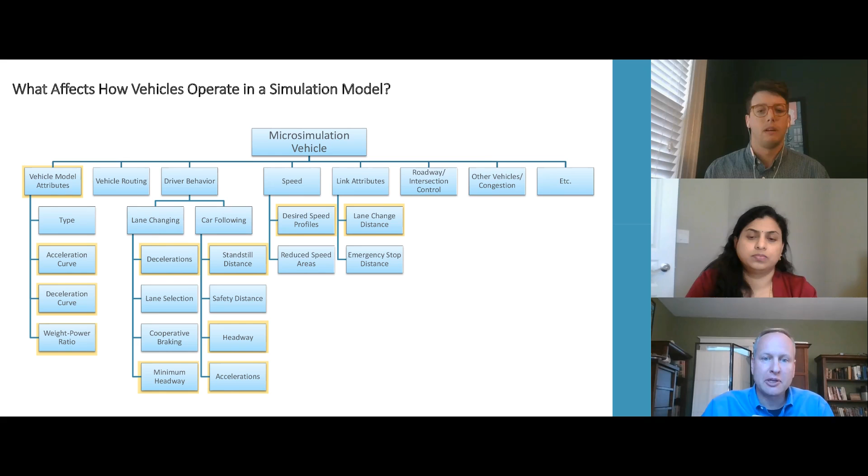The next slide shows how we try to capture many of those in the model. In the model, there are vehicle attributes and acceleration and deceleration. There are driver behavior characteristics, and there are lots of those - humans are complicated, so there's a lot of driver behavior issues there. Then there's speed profiles that affect the range of speeds a vehicle is going, say on a 55-mile-an-hour road. There are link attributes for how you drive a piece of road when you know you have to turn up ahead - when do you get into the right lane? So there are all these different things, and Adam is going to pick up here - all the ones that are highlighted are really the parameters we have focused on in our work, and they're key parameters that affect how the models function. Adam, with that, I turn it over to you.

Thanks, Rob. As he mentioned, the highlighted ones are the ones we're looking at. There are really 9 key parameters that we're going to be discussing and that we've tried to develop values for. A main piece of the phase 1 work leading into phase 2 was identifying the parameters - we just popped up on the screen like 20 different things, so identifying which ones are important and which ones we think we can impact.

We selected them really based on them fitting into one of three criteria: parameters that are frequently changed, parameters that have significant impacts on models whether they're often changed or not, and parameters that potentially have default values significantly different from Kentucky values. Those are the 3 criteria we were using, and from that we determined these 9 parameters to be the ones we thought we would study and try to develop information for.

I'm going to turn on this drawing tool so I don't talk with my hands as much, but these are the 9 parameters. I'm going to try to run through them here pretty quickly, just giving an overview of what they are, and then I'll follow back up on each one to go a little bit more into the weeds.

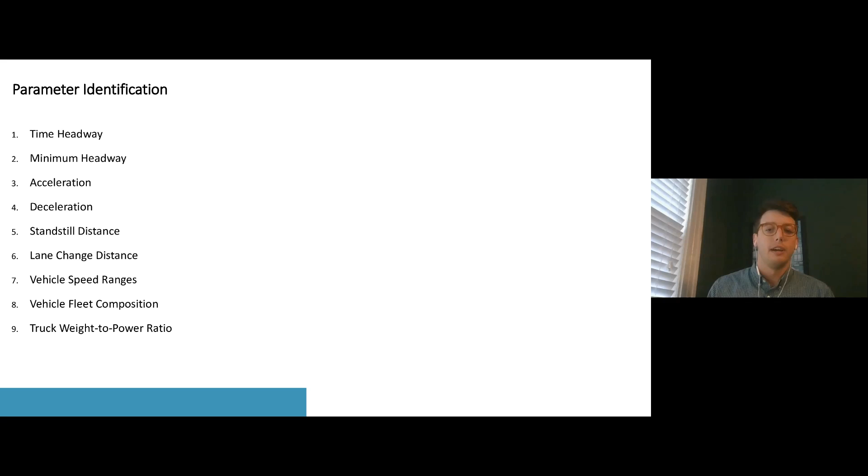Time headway is really the spacing you're leaving between vehicles when you're driving - the air gap between you and the person in front of you. Minimum headway is how close you're willing to get if you have to make a drastic lane change, merge, or weave maneuver - not what you're trying to do, but your tolerance for how close you will get.

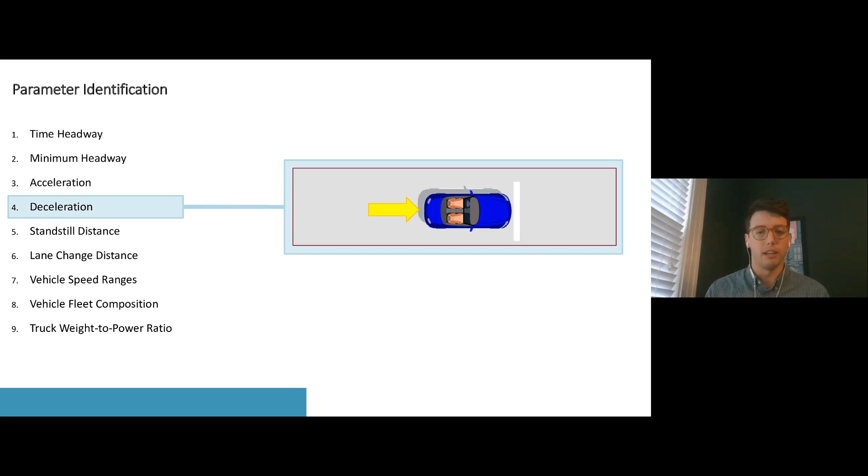Then we have acceleration and deceleration, which I think everyone is familiar with - just how fast you're increasing or decreasing your speed.

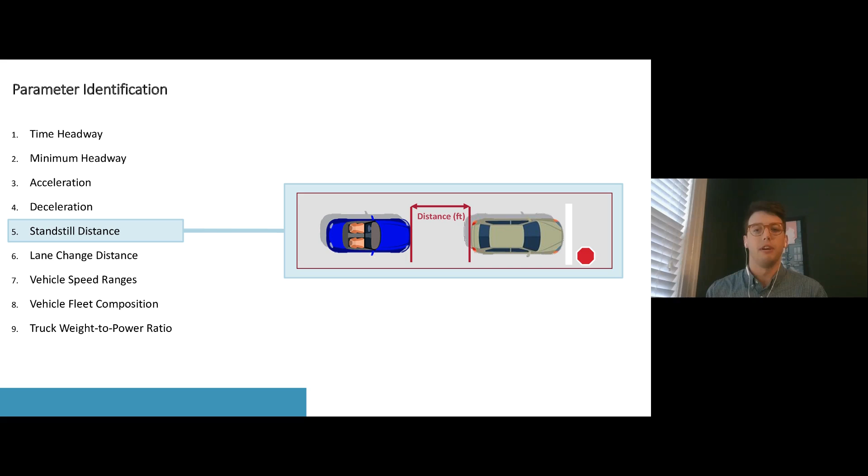Standstill distance is just the representation of the spacing you leave when vehicles are stopped, so in congestion or at a stop sign or a stoplight.

And then lane change distance, which Rob alluded to, is just the distance before an exit or a turn when a vehicle will start to get into the correct lane. So if you're in the left lane and need to take an exit on the right, how far in advance do you get into that lane?

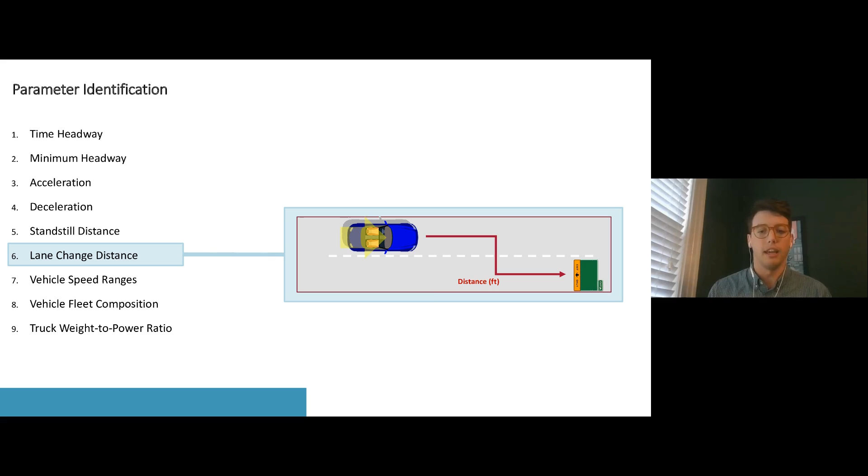Vehicle speed ranges is just the distribution for a given speed limit of the vehicles on the roadway. So you have a 65-mile-an-hour roadway. Is everyone doing 65? Are some people doing 70? Are some doing 40? And anywhere in between.

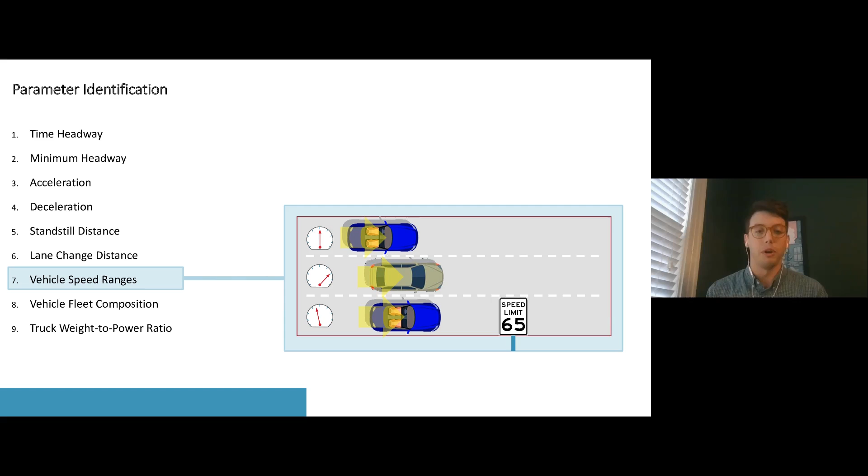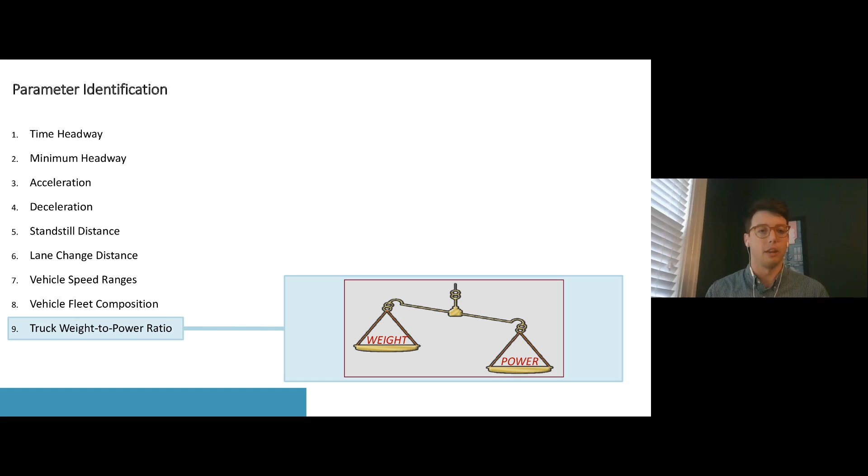And then vehicle fleet composition, just the makeup of what types of vehicles and percentage of heavy vehicles are in the fleet. And then the final one was the truck weight to power ratio. I didn't have an excellent graphic for this, but you get the idea—it's just the trade-off between weight and power for heavy vehicles, which impacts their acceleration and deceleration and effects on curves and grades.

So before I dig into the parameters and the analysis that we did, I wanted to hit on the way we were doing it. There are kind of 4 main different analysis methods we were using: historic speed data analysis, VIN data analysis, and then some research documents. So those are the three more traditional ways that you would see someone do this.

So we use drones to collect traffic videos at 8 different locations so far throughout the state—some in the Louisville area, some in Northern Kentucky, and some in Western Kentucky in the Paducah area. So we're capturing urban and rural environments, arterials and freeways. I wanted to hit on that since it's a different piece of this.

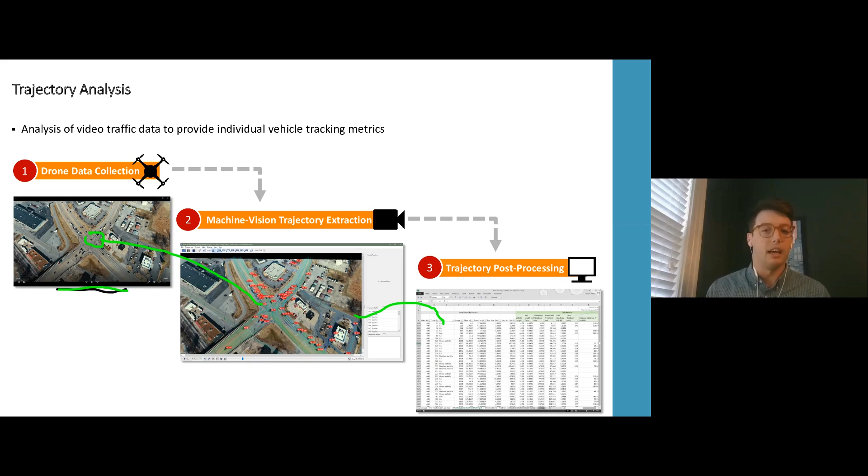We upload it to a platform called Data from Sky, and they're able to track each vehicle as they're driving through the video. The vehicles are geo-referenced, and you can get things like speed, location, acceleration, deceleration, headway, a bunch of those characteristics. They're a little harder to decipher than the way I'm making it seem, but you're able to get all of that in the video. Then we export that data into Excel or another data platform to do the analysis.

Again, the company is called Data from Sky. This is a PDF, otherwise this would be an animation, but you can see even here in this roundabout, they're capturing each vehicle, tagging it with an ID, identifying what type of vehicle it is, and different attributes like speed or acceleration.

So this is a new kind of realm of traffic analysis that I hadn't previously used, and I think it's going to become a more popular way to do this. It's relatively inexpensive if you're able to collect video data—I think they can do stuff with Miovision cameras, but also drone data. So it's a more detailed look at data that we previously tried to examine from just a tabular format.

So now I'm going to run through each of these parameters. I'd like to stay at a relatively high level—there's a lot of data and number crunching that is certainly interesting, I did a lot of it so I'm interested in it, but we don't really have time.

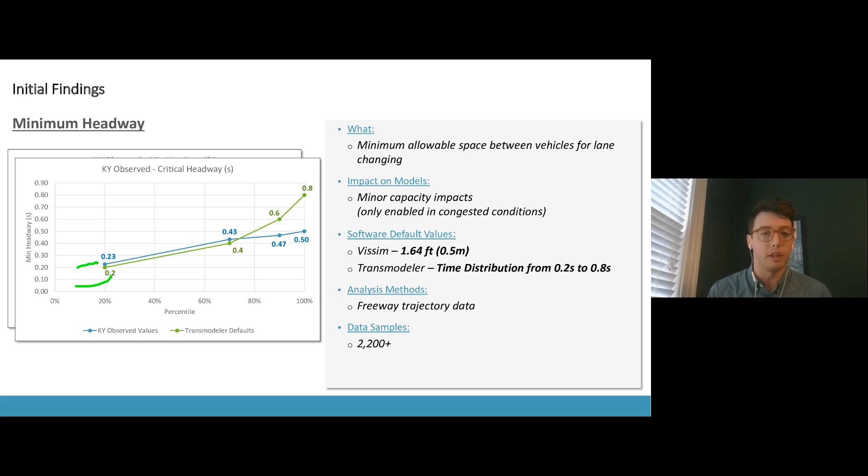So this is a parameter we're actually just validating what the software defaults say. Changing this doesn't have a huge impact on overall model performance just because it's not enabled that often. You do see people change it, and it was just something that personally I thought would be good to investigate and come up with some ranges for.

So the next question, the next parameter, which we do have a polling question for, is acceleration. So we're really looking at two pieces of this. There's a larger set that we could examine, but we're really trying to define what people are doing on specific roadway types based on the driving behaviors.

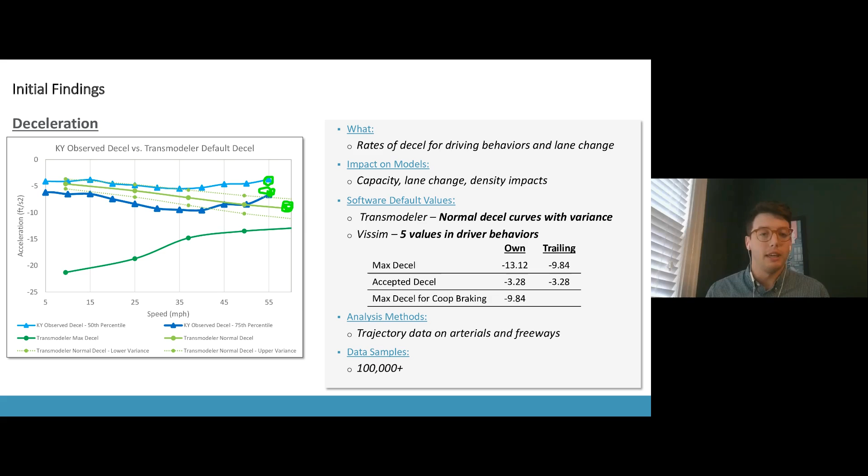So I will move quickly through deceleration just based on time. I think everyone understands what deceleration is for the most part, just how quickly you're stopping or slowing down. We had a poll question, but I think I'm just going to keep going. And if you look at this graph, this is our 50th and 75th percentile deceleration data compared to the Transmodeler normal deceleration curve, which is this green curve here. And then our data are these two blue curves. They're pretty similar, actually really close across the different speed ranges. So we didn't really, at this point, see a need to change the Transmodeler curves.

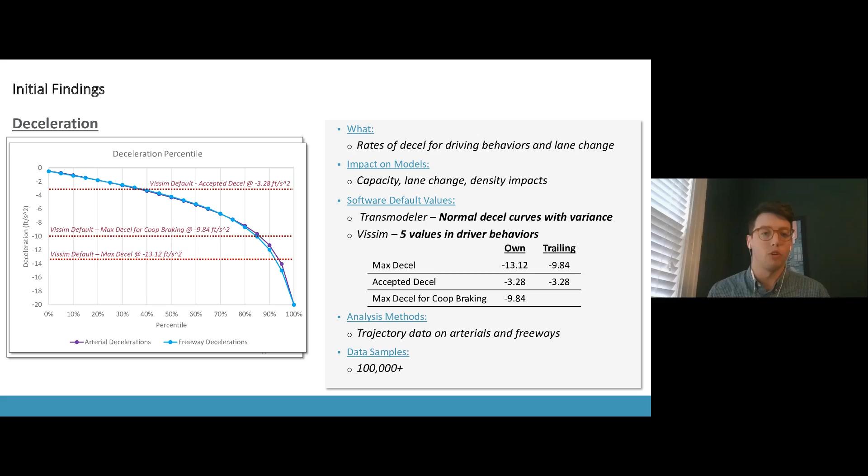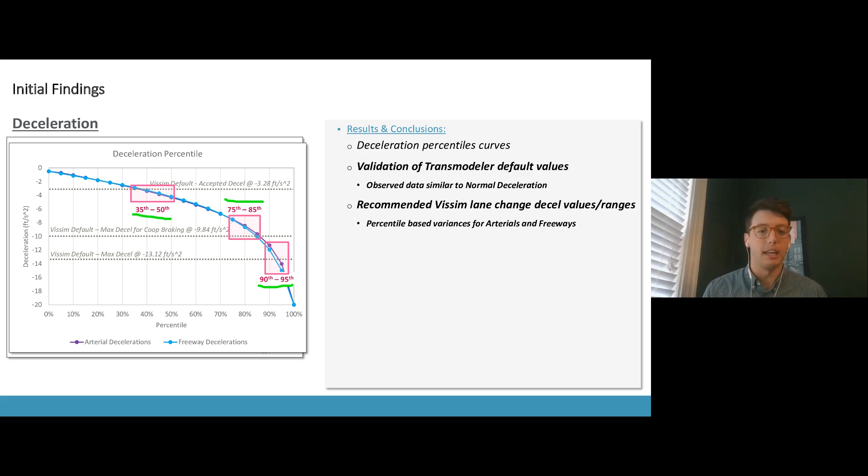Now the Vissim curves, again, looking at it in a different way, these softwares just interpret the data differently. So I'm often showing two graphs just to get it to be apples to apples, that's the best way to manipulate the data. So looking at the Vissim defaults compared to our deceleration curves, our data is this blue and purple line. And these Vissim default values are crossing the lines at some key percentile areas. So our recommendation is to really use those percentiles for the accepted deceleration, the deceleration you'd use to allow people to change lanes, and then the maximum deceleration. So using these ranges and providing some values, and maybe a default set that's in the middle of each of these ranges, will not vary the data too differently than Vissim and provide people with a real set based on Kentucky data. So jump to the next one here.

So the next one is standstill distance. Sorry, I was looking at the chat really quick, but standstill distance, again, is spacing people are leaving and stop conditions. So we actually do have a poll question. I think this one is probably more worthwhile than the last one. So if we want to throw that up, I'll keep talking as we're doing it.

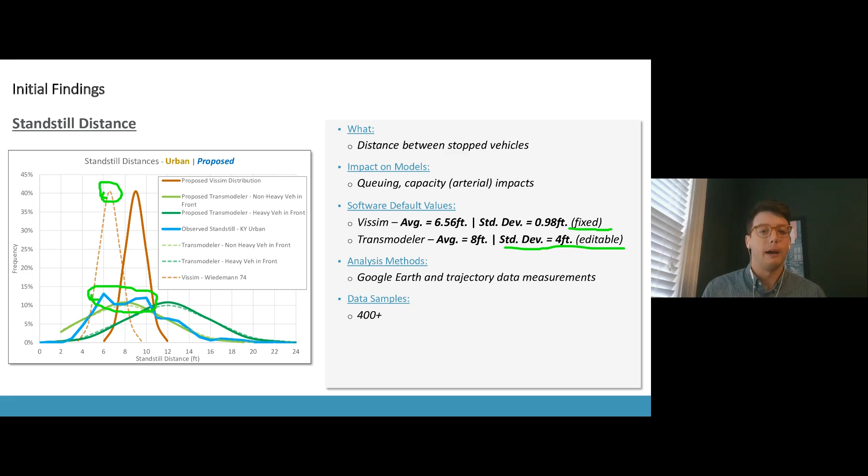You can see from the graph here, this blue line is our data set, and these two green lines are the Transmodeler curves. So our data is relatively close in magnitude and variance to the Transmodeler curves, just a little bit potentially more right leaning than the Transmodeler, so a little bit more conservative. In Transmodeler you can define the standard deviation, but in Vissim it's a fixed standard deviation. So not only is the Vissim default curve shown here in this dotted line more aggressive, it's also this tall spike. So our recommendation is to try to flatten out the Transmodeler curve slightly by applying a different standard deviation and average, and then just moving the Vissim curve over a little bit because we are not able to modify the standard deviation. But best case scenario is we allow people to be a bit more conservative in the space they're leaving.

So Adam, the results, just a quick summary: around 70% in the 5 to 10 range, which matches where the bulk of the data is for the data we collected, the blue line, and then some people 10 to 20, a few people less than 5.

We did this. There was some difference between urban and rural values, and that's why part of what's reflected on the graph is what we're talking about. I'm showing the urban graph here, but we created some rural values as well.

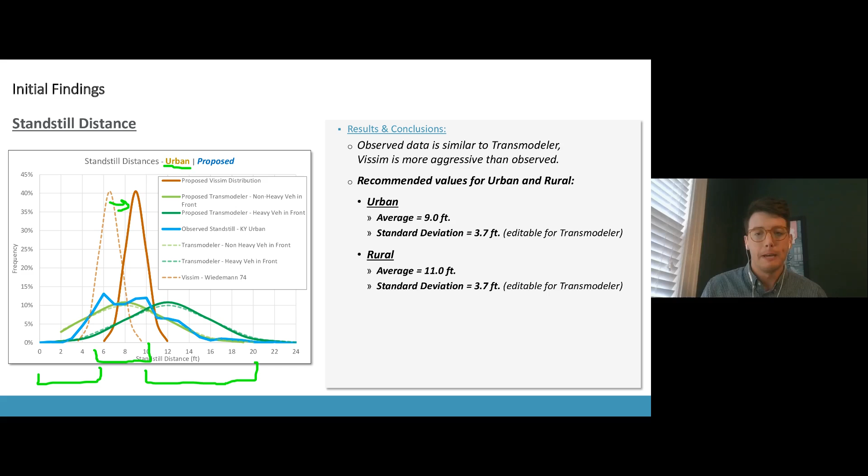I'm surprised that no one said they are just bumper to bumper. Surprised and disappointed. So I'll just keep rolling through these.

The next one is lane change distance. We used the trajectory data to get some anecdotal information about lane changes. This one's a little harder to define and is typically localized in some form. As you're driving, this is the definition of when you decide to get over or attempt to get over, whether there's another car there and you have to accelerate or decelerate, or wait until there's a gap. It's when you start to attempt to do that in order to make a turn or take an exit.

So that's another poll question we had. Hopefully you guys like doing this interaction. I've got the poll question up: when do you start trying to get into the correct lane for an exit? A mile, half a mile, quarter mile, less than 1,000 feet, or do you just cut right across the gore?

I'll just speak as I see these responses coming through. It seems like everyone in the group is similar to how I drive and how I observe people driving. For the most part, people are trying to change lanes pretty far in advance, especially on a freeway. On a city street it might be closer, but only 2 people answered less than 1,000 feet, and luckily no one's doing the funny option of the late merge across the gore.

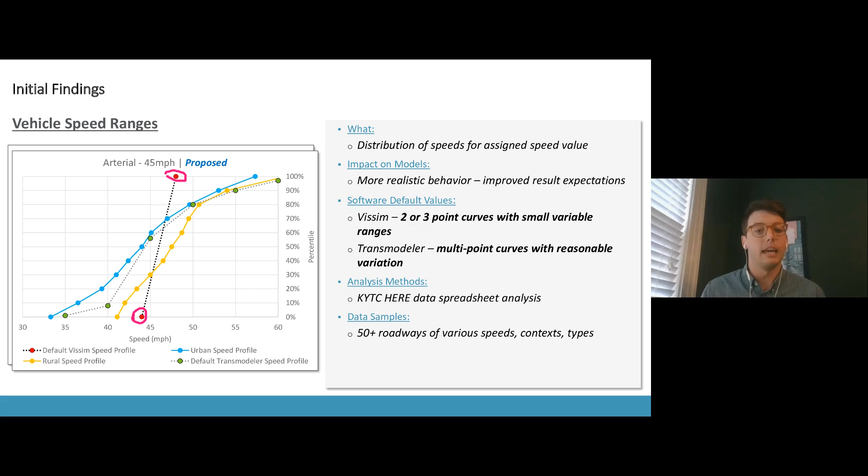So these would be something we could create and preload as defaults. We've looked at a host of different speed ranges for both urban and rural, as you see on these graphs, for some common speeds. All of those details will be on the handout—I didn't include all the ranges here, it would have created an insane slide, so they should be in the handout we have at the end.

I'll move quickly through these last three, then we'll hit the question. This one is vehicle fleet—the makeup of vehicles in the model, percentage of cars, trucks, different types. These navy blue options are passenger cars, and this green is pickups and SUVs. The Kentucky average, based on VIN data, has a lot of pickups and SUVs compared to what happens when you just open up Vissim.

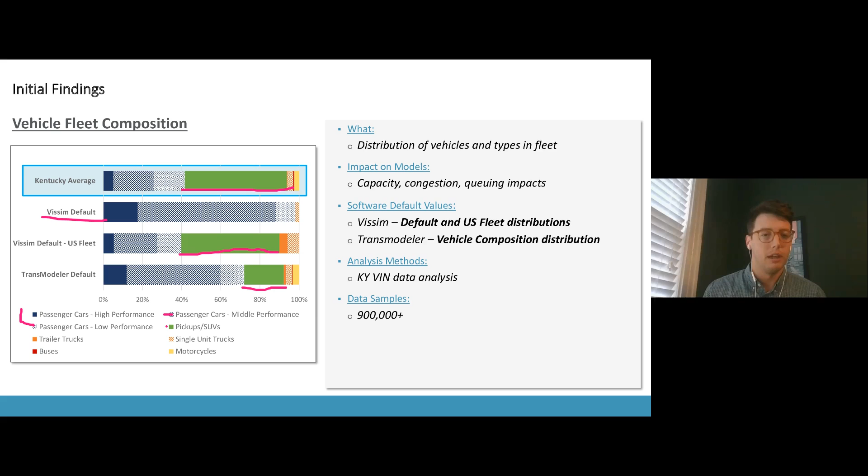But it's pretty similar to when you load in the US fleet in Vissim—you can do it, but when you just open the file, it's not there. Transmodeler is somewhere between those two; it has a decent representation of passenger cars of middle performance, which might function like a pickup truck or SUV, but size, spacing, and other attributes might be slightly different. So we've developed a range of recommended values, with upper and lower limits we think would be applicable based on the VIN data from Kentucky.

Again, this would be something you could supplement with local data if you have it—that's always great, but this is just to get us started, instead of having a bunch of European cars in there if you're using Vissim, or not having the right mix if you're using Transmodeler, although it's closer.

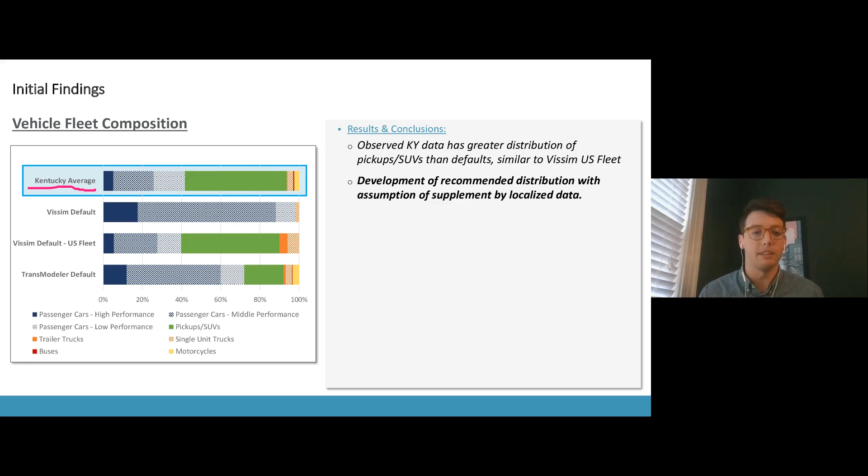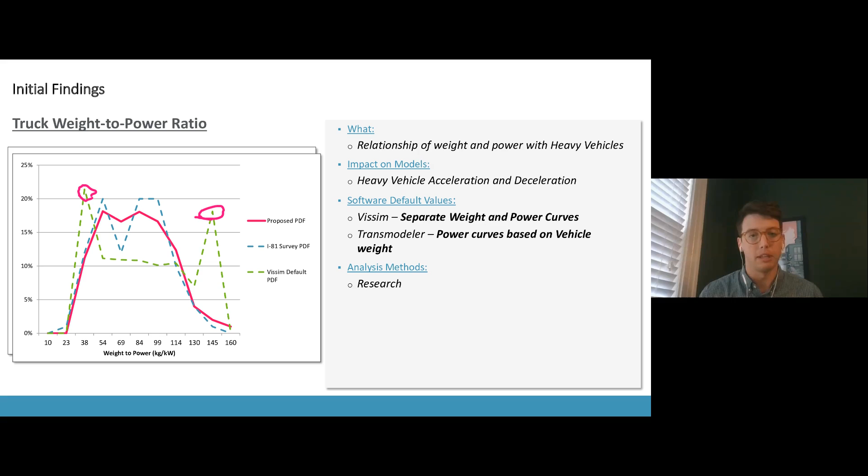So for both Vissim and Transmodeler, we're proposing a line that evens that out, distributing weight and power into more of the middle range for vehicles. This would likely impact how trucks and heavy vehicles accelerate and decelerate. A lot of times in Vissim, you see a truck accelerate just as fast or faster than a passenger car, and that's not really realistic in my experience. So we want to refine that and load it into the models in a better way. That was really the 9 parameters.

I moved quickly, hopefully that was a reasonable overview. In addition, we anonymously reviewed 15 or 20 previously submitted models for KYTC projects, and made observations about how people were coding and which parameters people were or weren't changing. There's a large amount of variability in the current set of models submitted in the last several years, so we're trying to work together to refine that.

That's kind of where we are today and where we're planning to go in the future. We're wrapping up phase 2, and as Jay and Rob mentioned, we're moving into phase 3—doing some case studies, coordinating with PTV and Caliper, and trying to finalize these parameter ranges and findings.